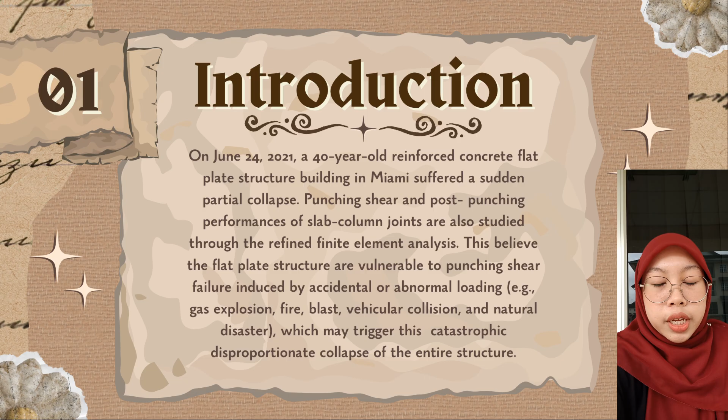Punching shear and post-punching performance of the typical slab-column joints are also studied through the refined finite element analysis. On June 24, 2021, at approximately 1:30 a.m., the Miami suburb of Surfside, Florida, United States, experienced a sudden partial collapse and 98 people were confirmed dead.

Based on site investigation, much research has pointed out that punching shear failure at the slab-column joints might be one of the most likely reasons. It was found that the post-punching bearing and deformation capacities of the slab-column joints were predominantly determined by the structural integrity reinforcement, and the addition of the embedded beams facilitated greater deformation and load capacities in the large deformation suspension stage.

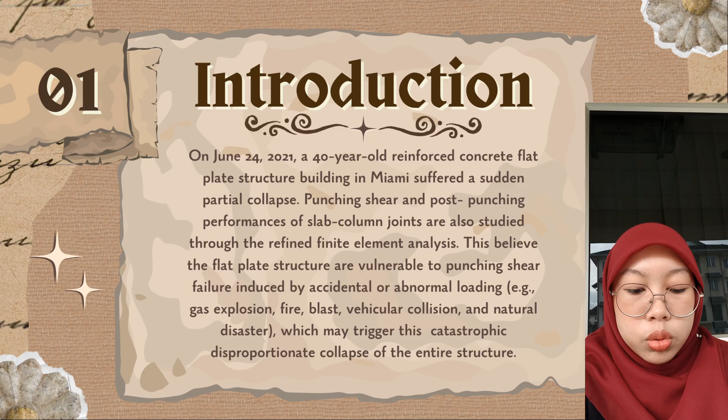The visualized collapse simulation demonstrated that after the collapse of the middle part of the structure, the shear walls on the east side were not strong enough to prevent collapse propagation. The shear walls on the west side, on the other hand, were much stronger and thus did not experience progressive collapse. In summary, the collapsed structure has a low level of safety margin, robustness, and resistance to progressive collapse, which in general can inevitably lead to serious consequences if local damage occurs due to unexpected and unforeseeable reasons.

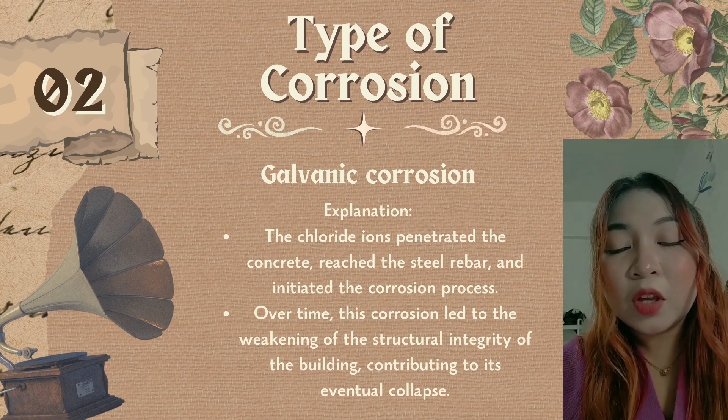The type of corrosion is galvanic corrosion, where the steel rebar embedded in the concrete corrodes due to the presence of chloride ions from seawater and other environmental factors. The chloride ions penetrate the concrete, reach the steel bar, and initiate the corrosion process. Over time, this corrosion leads to the weakening of the structural integrity of the building, contributing to its eventual collapse.

Mechanism of corrosion. First is electrochemical reaction. The corrosion of rebar is an electrochemical process where iron reacts with oxygen and water to form iron oxide. The chloride ions accelerate this process by breaking down the passive protective layer on the rebar. Second is environmental factors. Proximity to the ocean increases exposure to salt-laden air, leading to a higher concentration of chloride ions in the environment. High humidity and temperature in the region also contributed to the corrosion rate.

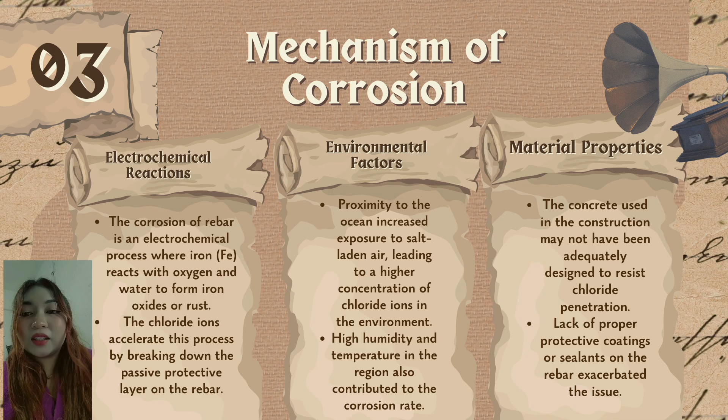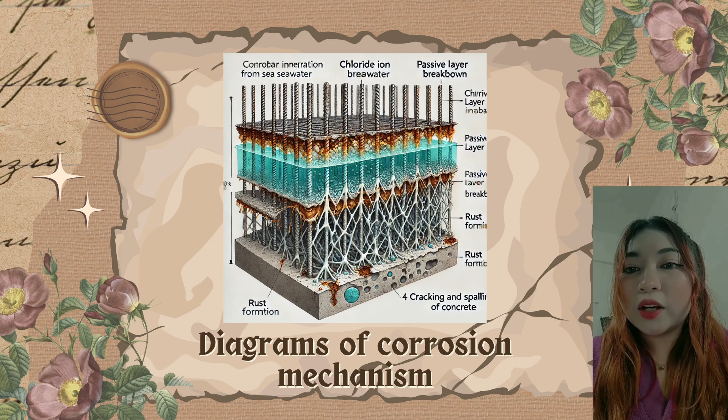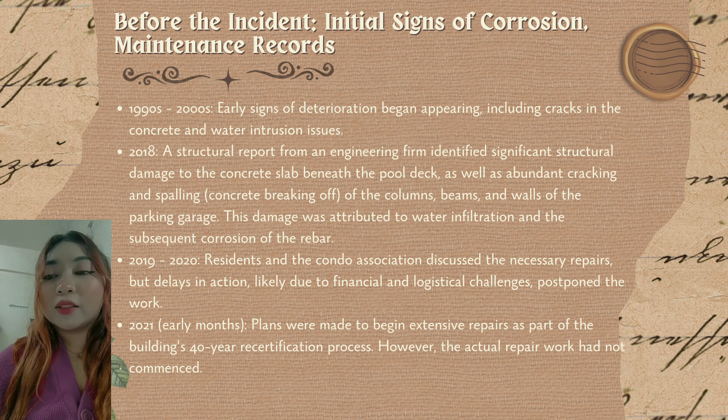During the incident on 24 June 2021, the condominium partially collapsed. Within a minute, first responders arrived on the scene to conduct rescue operations. In the early hours, the magnitude of the collapse was evident, and the rescue team worked through the night to save as many lives as possible.

Immediate aftermath. Search and rescue operations continued for weeks, with teams from across the country joining the effort. Unfortunately, only a few survivors were pulled from the rubble in the initial hours. A total of 98 people lost their lives in the collapse, making it one of the deadliest building collapses in US history.

Long-term consequences. Multiple investigations were launched to determine the cause of the collapse. Second, lawsuits were filed by victims' families and survivors against the condo association and others involved in building management and maintenance. The tragedy prompted discussion about stricter building codes and more inspections. The collapse had a profound effect on the local community and beyond, raising awareness about the importance of timely maintenance and structural health monitoring.

From 1990 until 2000, early signs of deterioration began appearing, including cracks in the concrete and water intrusion issues.

2018, a structural report from an engineering firm identified significant structural damage to the concrete slab beneath the pool deck, as well as abundant cracking and spalling of the columns, beams, and walls of the parking garage. 2019 until 2020, residents discussed the necessary repair but delayed action due to the finances.

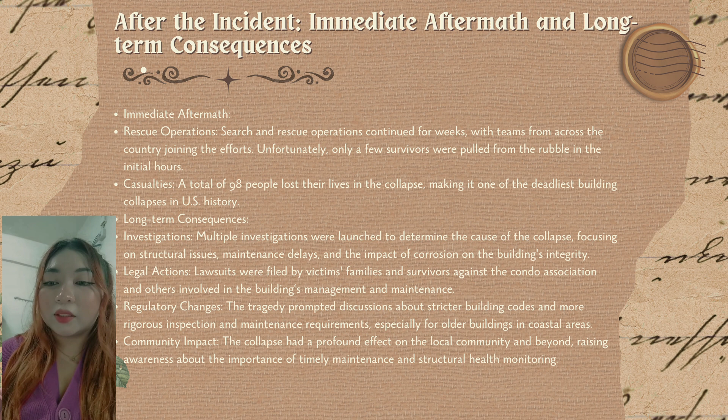2021, plans were made to begin extensive repair as part of the building's 40-year recertification process. However, the actual repair work had not commenced. The Surfside condominium collapse in Surfside, Florida was a tragic incident that resulted in significant loss of life and property. Below is the analysis of the factors. The first factor is the environmental conditions.

Proximity to salt water. The condominium was located near the ocean, exposing its concrete and steel components to a corrosive marine environment. This salt-laden air and water infiltration can lead to chloride-induced corrosion of reinforcing steel, causing it to expand and crack the surrounding concrete. Over time, this weakens the structural integrity of the building.

Next, the rising sea levels and flooding. The increasing frequency of flooding due to climate change may have undermined the building's foundation. Saltwater intrusion into the foundation can accelerate breakdown of materials, especially in poorly waterproofed areas. Soil subsidence. Studies have indicated that the ground beneath the building may have been sinking over time, contributing to differential settlement and uneven stresses on the structure.

The second factor is the design flaws. Inadequate drainage systems. Poor drainage design on balconies, roofs, or parking areas can lead to water pooling and seepage into structural elements. Persistent moisture accelerates corrosion and concrete spalling. Next is the flat slab construction. The building used a flat slab design, which lacks beams between columns to distribute loads. This design is more exposed to punching shear failure, particularly when combined with the breakdown of concrete and corroded reinforcing steel.

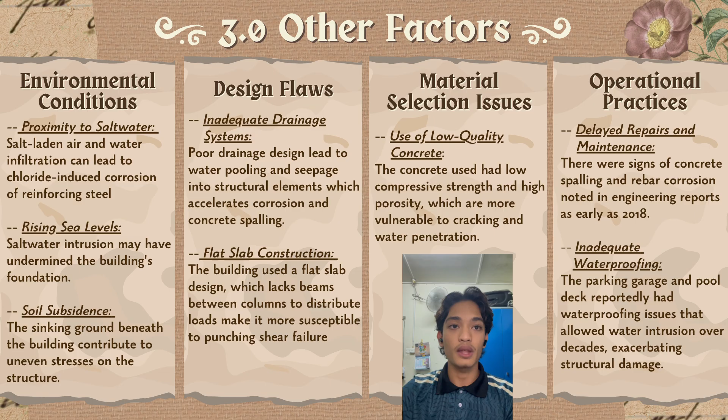Delayed repairs and maintenance. Records show that structural issues had been identified years before the collapse, but critical repairs were delayed. For example, there were signs of concrete spalling and rebar corrosion noted in the engineering reports as early as 2018. Lastly, inadequate waterproofing. The parking garage and pool deck reportedly had waterproofing issues that allowed water intrusion over decades, exacerbating structural damage.

Surfside condominium collapse. Maintenance practices were insufficient to address the significant structural vulnerabilities that had developed over the building's lifespan. Below is an analysis of the key aspects of maintenance practices. Firstly, the irregular inspections. The Champlain Towers South Condominium Association had commissioned engineering inspections, including the notable 2018 Structural Engineering Report. This report identified major structural issues, such as concrete spalling and rebar corrosion in the parking garage and pool deck. The 2018 report explicitly warned about the need for extensive and timely repairs.

However, there were significant delays in acting on these findings, and the building did not undergo the immediate remediation recommended by the engineers. Secondly, the corrosion protection measures. Evidence suggests that measures such as applying waterproofing membranes, ensuring adequate drainage, or sealing cracks in the concrete were either inadequately implemented or had degraded over time.

The 2018 report noted that the pool deck waterproofing had failed, allowing water to seep into the concrete slabs below. This prolonged exposure to moisture facilitated the corrosion of the reinforcing steel in critical load-bearing areas. Next, the maintenance records. Available records indicate that while some repairs were made over the years, they were largely piecemeal and reactive rather than part of a comprehensive maintenance strategy. Routine maintenance work did not address the systemic structural vulnerabilities noted in the engineering assessments.

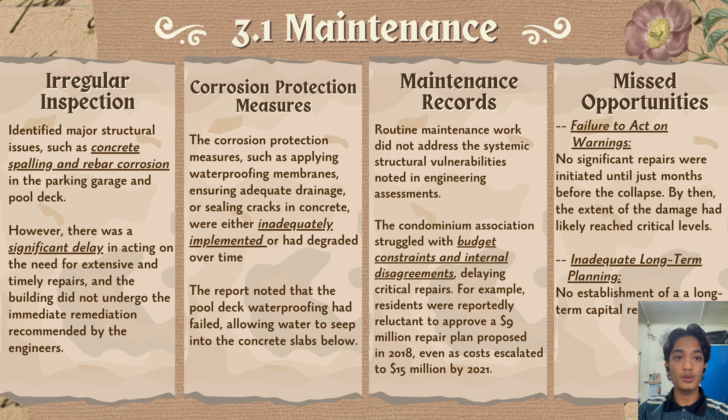Inadequate long-term planning. The Condominium Association did not establish a long-term capital reserve fund for addressing large-scale structural issues. As a result, essential repairs were delayed due to the high costs and lack of financial preparedness.

Errors during the manufacturing and construction process may have contributed to the Surfside condominium collapse. Each of these errors are explored below. First of all, are the errors in material selection. Use of substandard concrete. During construction, if concrete with inadequate compressive strength or high porosity was used, it could have accelerated degradation when exposed to environmental conditions such as salt-laden air and water. Poor quality concrete is more prone to cracking, which allows moisture to penetrate and corrode steel reinforcement.

Next is the improper waterproofing materials. The failure to select durable and long-lasting waterproofing materials, particularly for the pool deck and parking garage, contributed to water intrusion that promotes corrosion. Second of all, the inadequate quality control.

Improper concrete pouring and curing. Errors during the pouring and curing process of concrete can lead to uneven strength distribution, shrinkage cracks, or weak spots. If construction crews did not adhere to strict quality control measures, these flaws could have compromised the building's structural capacity from the start.

Next, the rebar placement errors. Incorrect placement or insufficient spacing of reinforcing steel can result in inadequate load distribution or insufficient concrete cover, exposing the steel to moisture and accelerating corrosion. Quality control ensures that materials and workmanship meet design specifications and standards. Lapses in quality control during construction could result in latent defects that only become evident years later under stress or environmental exposure.

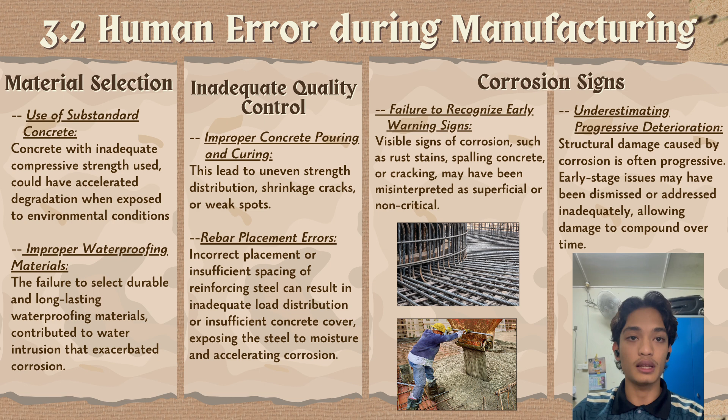Human error during manufacturing and construction, ranging from poor material selection and inadequate quality control to misinterpretation of corrosion signs, likely played a role in the long-term vulnerabilities of the Surfside condominium. These errors, compounded by environmental exposure and deferred maintenance, created the conditions for structural failure.

Onto the prevention suggestions. These are the recommendations that can be made to prevent similar incidents as the Surfside condominium collapse in Surfside, Florida in the future. Firstly, material selection. Future construction projects in coastal areas must prioritize materials with proven resistance to corrosion, such as high-strength concrete and epoxy-coated rebar. Design practices. Design buildings with elevated foundations and advanced drainage systems to mitigate the effects of flooding, rising sea levels, and water intrusions.

Next, weight distributions. Avoid overloading structures by using lightweight construction materials where possible. Ensure proper distribution of load across structural elements to avoid overloading specific areas. Next, modern technologies. Use artificial intelligence, AI, to analyze structural health monitoring system (SHMS) data and predict potential failures before they occur. Installation of AI sensors to monitor critical parameters such as corrosion rates and vibrational levels.

Training and expertise. Inspectors and maintenance personnel should receive specialized training to identify and address corrosion and other structural issues accurately. Regular inspections and funding. Mandate comprehensive inspections of older buildings at more frequent intervals, such as every 10 to 20 years instead of 40 years, to detect early signs of deterioration. Establish mandatory capital reserve funds for condominium associations to ensure sufficient resources for large-scale repairs and upgrades.

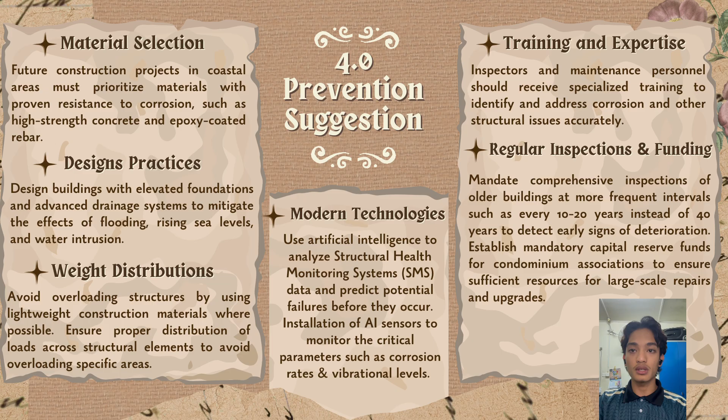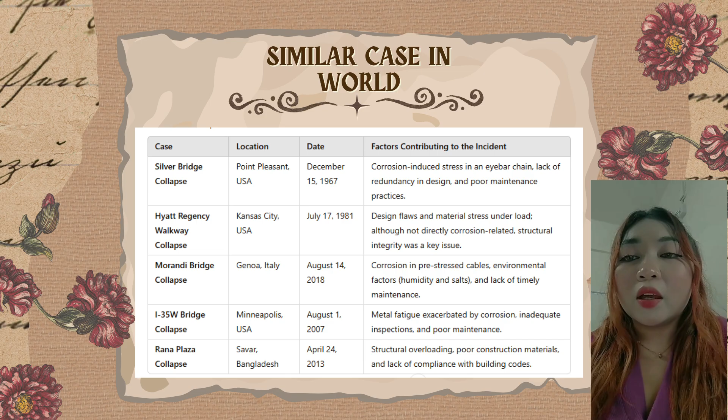The Surfside condominium collapse shares similarities with several other incidents worldwide, where structural failures were influenced by corrosion, material degradation, or improper maintenance. So the table shows a comparison of 5 similar cases. These are the common factors and lessons learned. First is environmental condition. Second is material and design flaw. Third is inadequate maintenance. Fourth is human error.